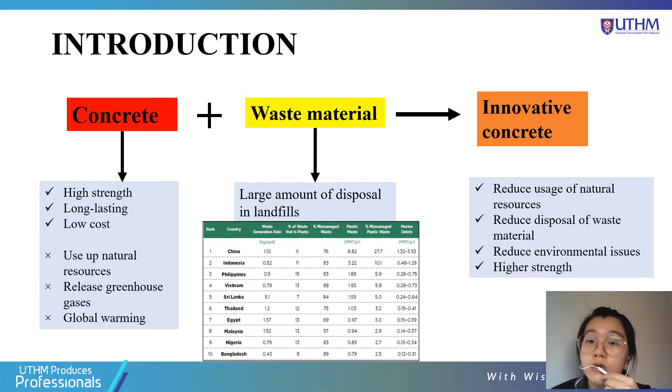The innovative concrete will also result in higher strength than conventional concrete. Therefore, the objective of this study is to determine the optimal composition of different ratios of fine aggregate plastic waste in producing concrete by using SolidWorks software, and to evaluate the physical and mechanical properties of different ratios of fine aggregate plastic waste in producing concrete by using SolidWorks software. The third objective is to compare the properties of concrete made from plastic waste and conventional concrete by

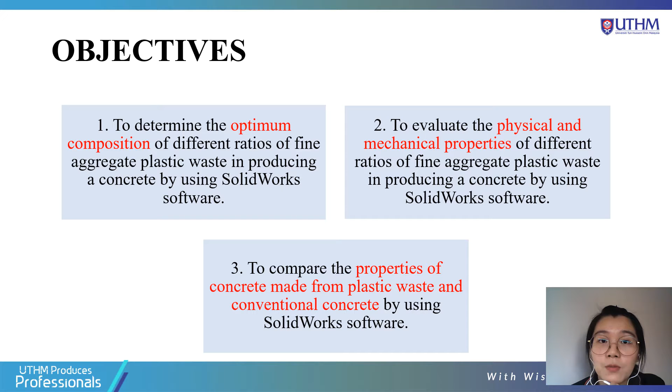using SolidWorks software. Next, the scope of the study is to determine the optimal composition of different ratios of fine aggregate plastic waste in producing concrete. There are 5 samples prepared in the study. 4 samples are prepared with ratios of 20%, 40%, 60%, and 80% of plastic waste, respectively, while 100% fine aggregate will be prepared as a control sample.

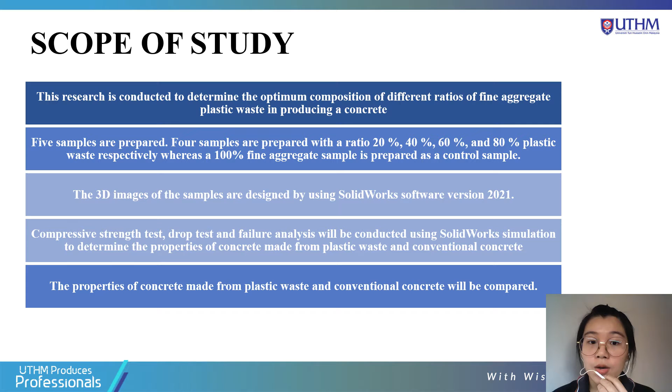Then, the 3D image of the samples will be designed using SolidWorks software version 2021. SolidWorks is also used to conduct the compressive strength test, drop test, and failure analysis in order to determine the properties of concrete made from plastic waste and conventional concrete. Lastly, the properties of the concrete made from plastic waste and conventional concrete will be compared.

In recent years, many scholars have tried hard to find an alternative replacement in concrete made from waste material. According to Mohajerani and Ramkumar, they used cigarette butts as a replacement in producing concrete, and found that cigarette butts can improve the strength of concrete. According to Kumar, bottom ash as a replacement of fine aggregate can improve the strength of concrete.

Arivalagan, who used plastic waste as a replacement in producing concrete, found it can also improve the strength of concrete but should have an optimum value. Al-Khateeb and Ramkumar, who used glass as a replacement in concrete, also found improvement in the mechanical properties, which are compressive strength and failure strength of concrete.

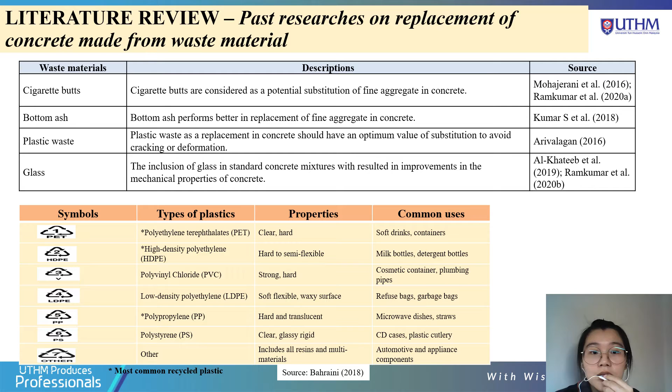For plastic, there are 7 types of plastics, and the 3 common recycled plastics in Malaysia are PET, polyethylene terephthalate, Type 2 plastic, HDPE, and Type 5 plastic, polypropylene. These plastics have their own properties and common uses.

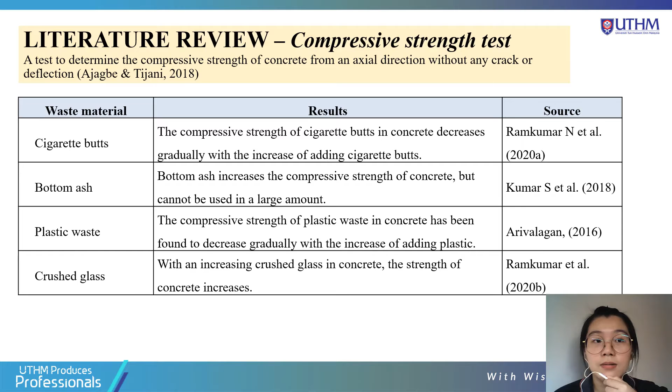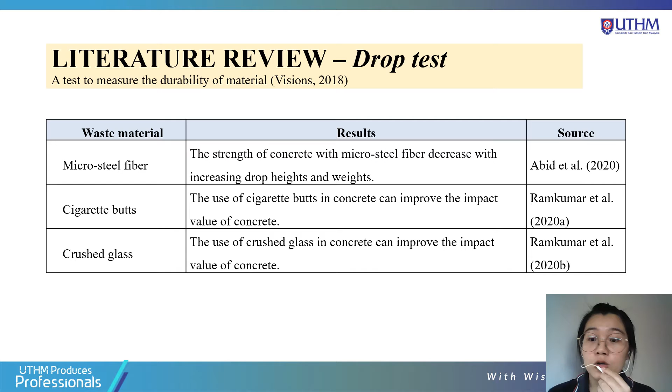A drop test is used to measure the durability of the material under the height or weight of an impact force. According to Abid, micro steel fiber used as a replacement in producing concrete can increase the strength of concrete but with a limited height. According to Ramkumar, using cigarette butts as a replacement can also improve the impact strength of concrete, and using crushed glass can improve the impact value and the strength of the concrete.

Failure analysis is used to identify and investigate the reason for a failure. According to Abid, who used self-compacting reinforced concrete with micro steel fiber, there will be a failure in the concrete. They can increase the steel fiber content to increase the strength in order to recover from the failure. Then, Weijie used steel reinforced concrete.

They found that the concrete will fail due to carbonation of concrete and chloride penetration. So, they can use acoustic emission techniques and fiber optic sensors to overcome the corrosion of steel reinforced concrete in order to improve the strength of the concrete.

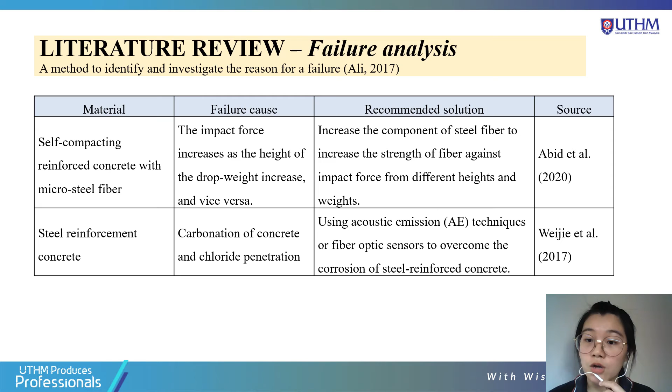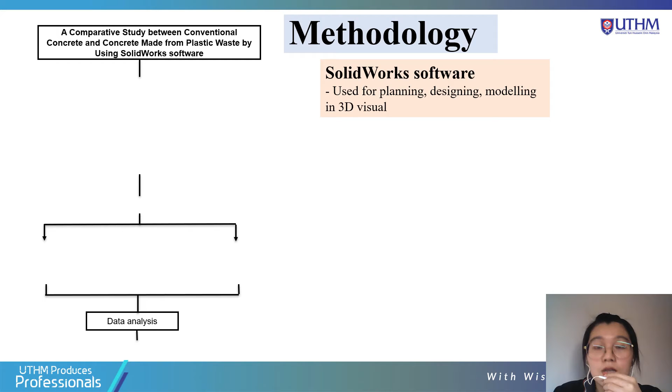Now we move on to the methodology part in this study. In this study, SolidWorks software is used to carry out the testing of prepared assemblies. SolidWorks software is used for planning, designing and modeling the test in 3D visual.

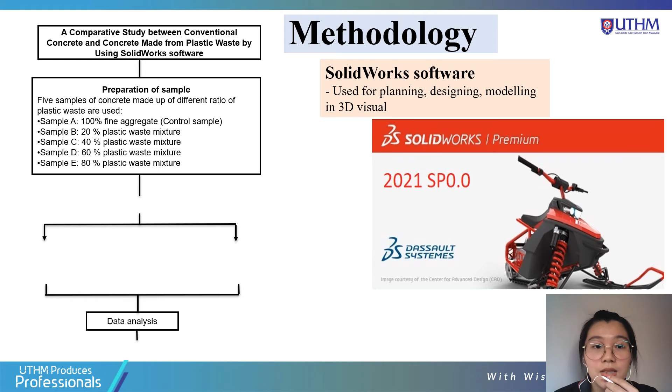So, in the preparation of samples, 5 samples of concrete will be made with different ratios of plastic waste. Sample A is the control sample with 100% fine aggregate. Sample B will use a 20% plastic waste mixture, and in this study, soft LDPE plastic and hard HDPE plastic will be used as a mixture throughout the study. Sample C will use 40% plastic waste, sample D 60%, and sample E 80%.

After the preparation of the samples, SolidWorks software is used to simulate the results. In this study, 3 types of tests will be carried out. The first ones are the compressive test and drop test, which are under the mechanical properties of concrete. Then, after the testing, we'll undergo a physical test, which is the failure analysis. After the testing, the data will be analyzed. Then, we'll come out with a conclusion for this study.

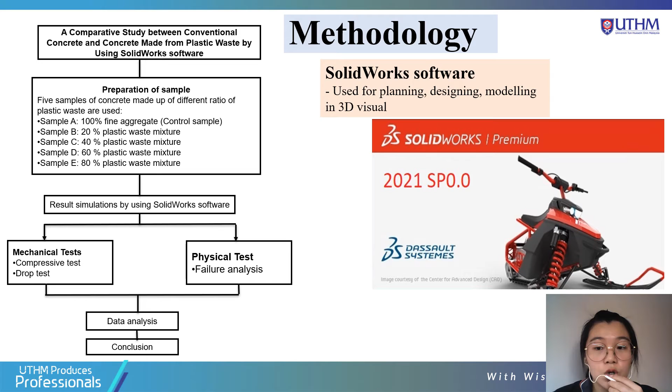In this study, the samples are designed as cubes using SolidWorks software. You can see here, the left-hand side is the control sample, which consists of 100% fine aggregate. The cube is designed with a square in 2D, and then we extrude the cube with a height of 100 mm to make it into a 3D model cube. Then we assign the material to the cube.

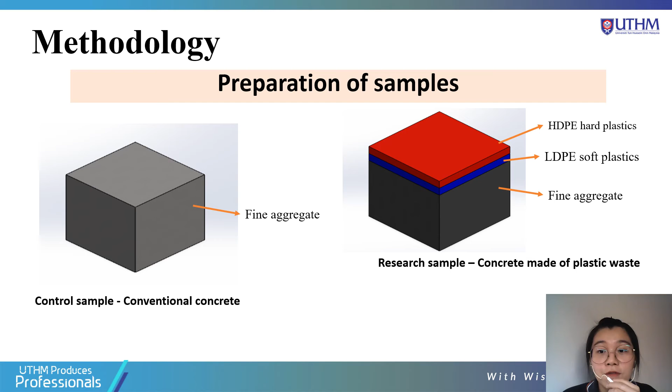Meanwhile, the other research sample on the right-hand side consists of 3 parts. The first part consists of fine aggregate. The second part, the blue one, consists of LDPE soft plastics. And the third part, the red one, consists of HDPE hard plastics. These 3 parts are assembled using SolidWorks software to make a plastic mixture and fine aggregate concrete. Then the samples will undergo mechanical testing using SolidWorks software.

There are 2 tests under the mechanical test, which are the compressive test and the drop test. In the compressive test, each of the samples will be tested with 6 different forces: 100 Newton, 1000 Newton, 2000 Newton, 3000 Newton, 4000 Newton, and 5000 Newton. The range of forces will show the strength the concrete can withstand. After we assign the force to the samples, we run the simulation, and we will have the result as you can see in the figure here.

Then for the drop test, we will use 4 different heights in the study: 1 meter, 2 meters, 3 meters, and 4 meters. Each of the samples will be tested under these 4 different heights. After assigning the height to the sample, we'll run the simulation. After running the simulation, we'll have the result as shown in the figure here.

Then, after the mechanical testing, we'll move to the physical testing. Physical testing is done using failure analysis, which is also used to define the physical properties of the concrete. Using failure analysis, the problem, which is the failure of the concrete, will be identified, and then we'll compare the properties of conventional concrete and concrete made from plastic waste. Then we'll identify the root cause of the problem. Lastly, we'll determine corrective actions to provide a solution to prevent the concrete from failure, cracking or deformation.

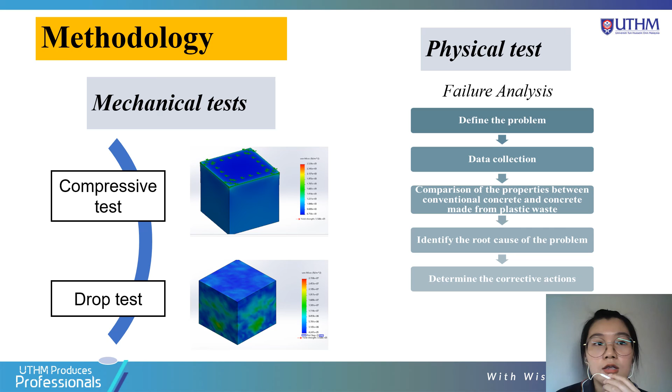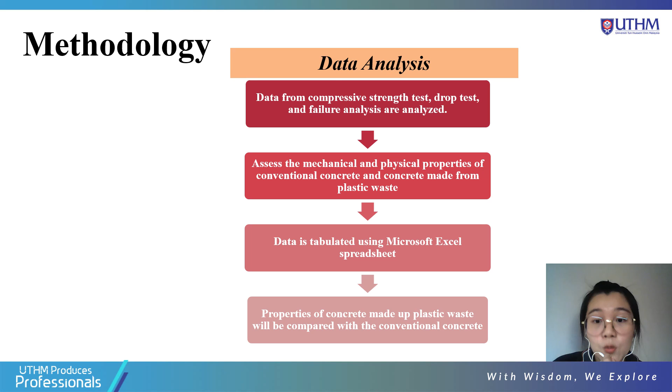After the testing, the data from the compressive strength test, drop test, and failure analysis will be analyzed. Then, we assess the mechanical and physical properties of conventional concrete and concrete made from plastic waste. The data will be tabulated using Microsoft Excel. Lastly, the properties of the concrete made from plastic waste will be compared with the conventional concrete.

So, the first objective will be achieved by using different ratios of fine aggregate and plastic waste in producing concrete. Therefore, the optimal composition will be determined using different ratios. Then, the second objective will be achieved using the mechanical testing, compressive strength test and drop test, and the physical test, failure analysis. After the testing, the physical and mechanical properties of different ratios of fine aggregate and plastic waste in producing concrete will be identified. Thus, the difference between the properties of concrete will be determined using data analysis. Therefore, data analysis is used to achieve the third objective.